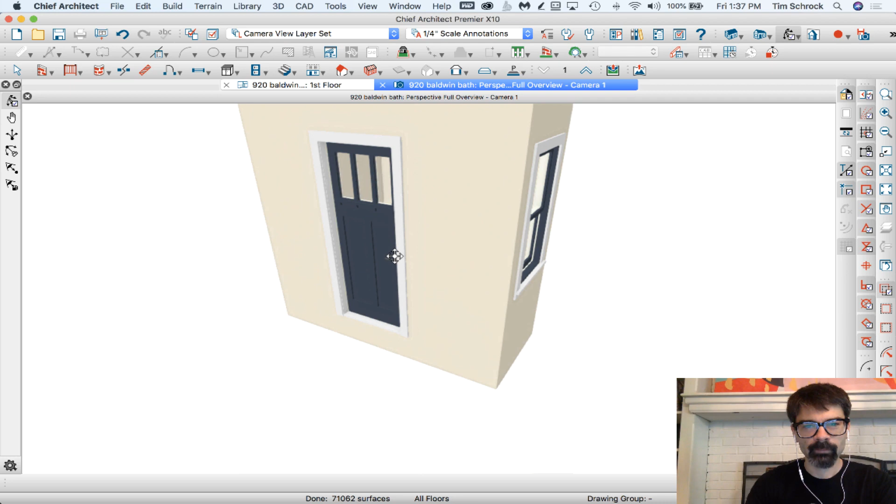All right, the question is, half of this wants to be sloped ceiling. I'm going to take a look at the whole thing here. You got the slope right, there we go. So this is a good start.

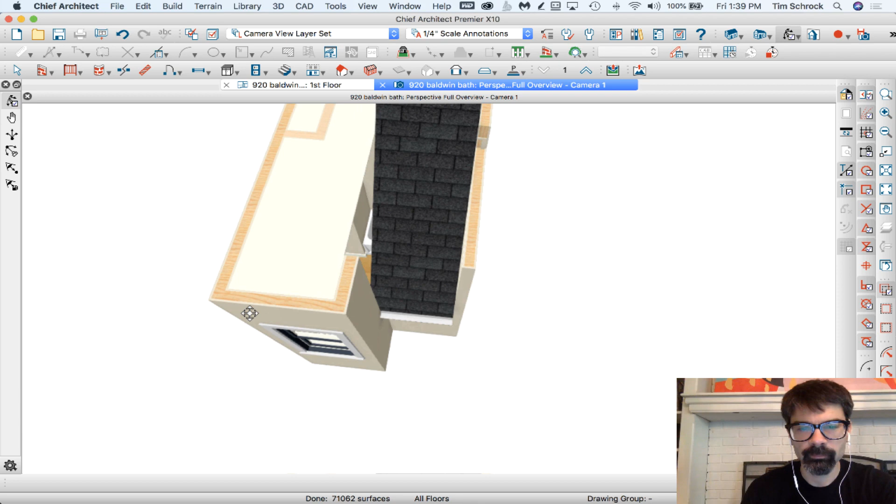Let's get into that here. All right, so since the corner here really needs to remain full height, right? Let's go. Yep. This corner, this wall is going to remain full height over here, right? This one here, this wall on this side is going to be sloped, and we can do that in a couple different ways.

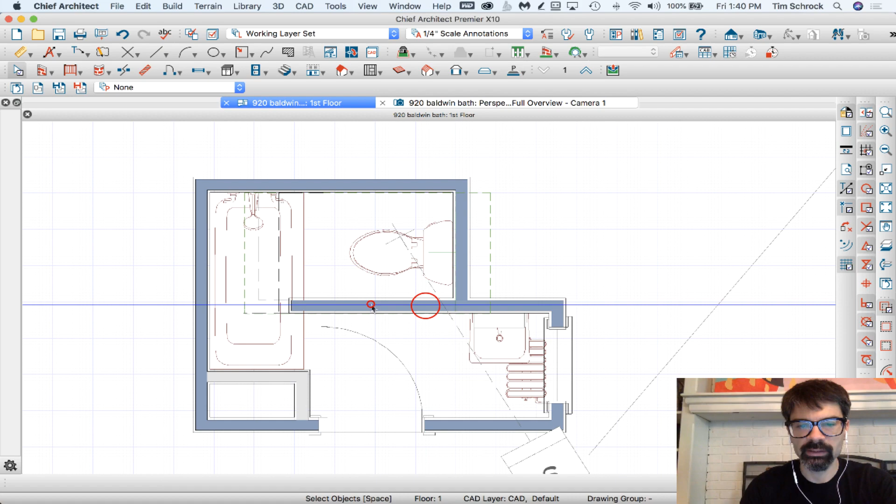So what I'm going to do is I'm going to break this wall here. You've got a single wall. No, I'm sorry, you don't have a single wall, you've got two walls. That's great. What you've done is fantastic. You've flipped the layers, so the exterior of this wall is on the top, the exterior of this wall is on the bottom. Fantastic. I'm going to select the wall then and hit the number 3 on my keyboard.

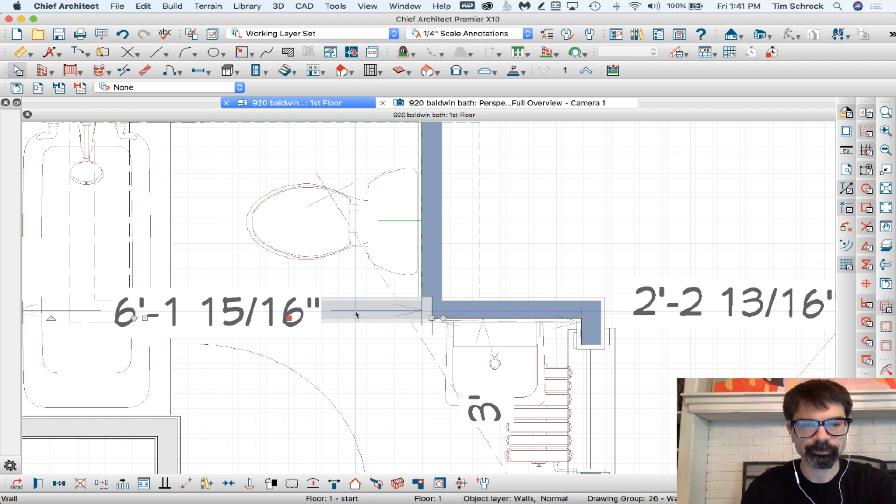And that puts a break in this line of the wall, so I can pull this one up, and this one stays where it is. Now, I'm going to open this one. What I did was double right click, so this menu popped up. And I'm going to go to roof cuts wall at bottom, right there.

So any roof that is cutting this wall, typically any roof that's over this wall, Chief would cut the bottom, or cut the top off of the wall, and the bottom would remain. This little piece in the specification means that the top remains and the bottom is gone.

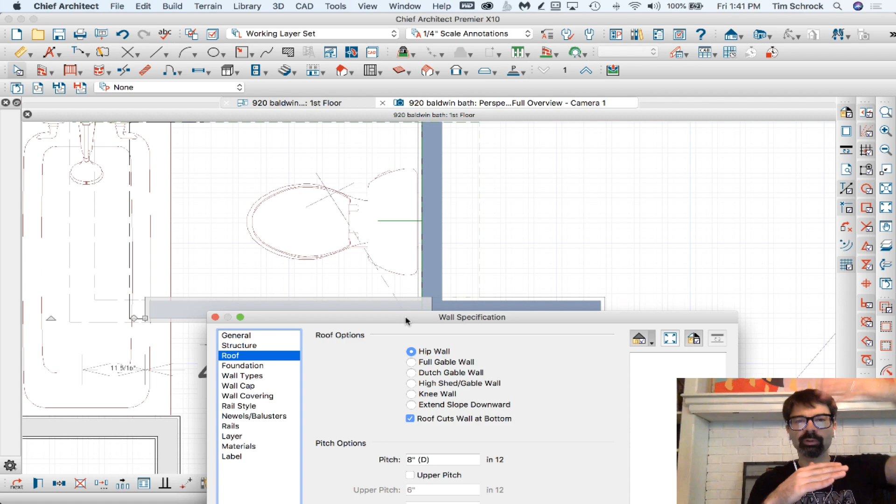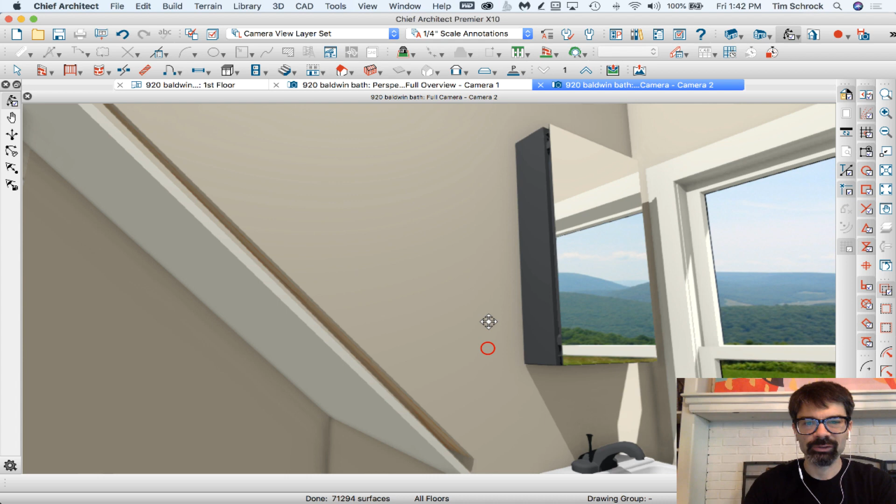Okay, let's pull that up. So I can hit the OK button. Let's see if that did it. Sometimes it doesn't work well. And so I have a little trick that shows what it does. But it worked just fine here.

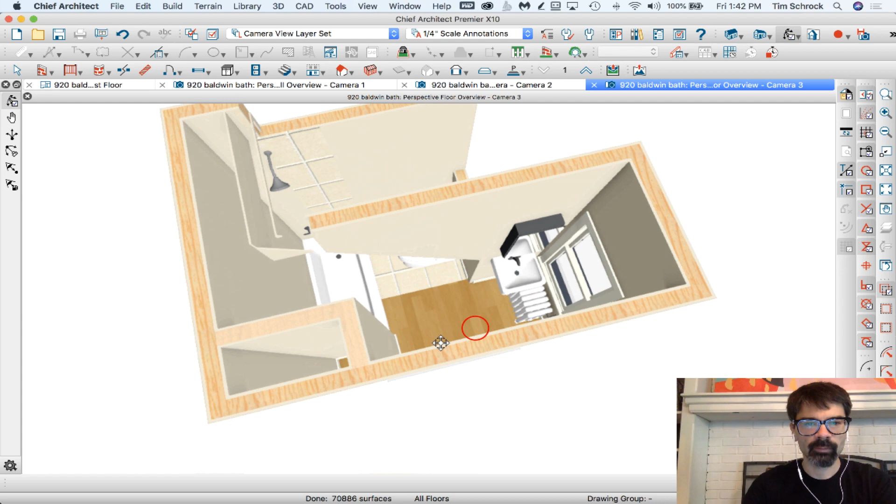Now the one thing that's odd is this piece, this gap here. We could probably... I think, let's take a dollhouse view of this. I'm guessing what you were trying to do is you're trying to make that ceiling height there.

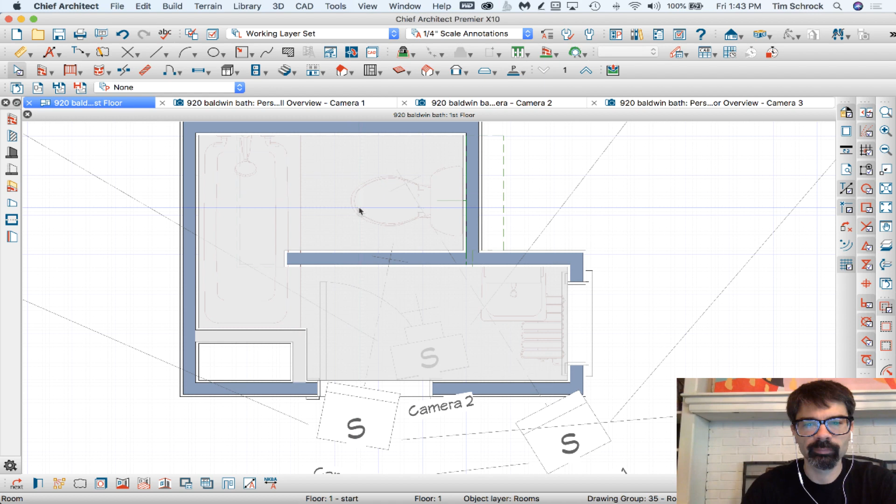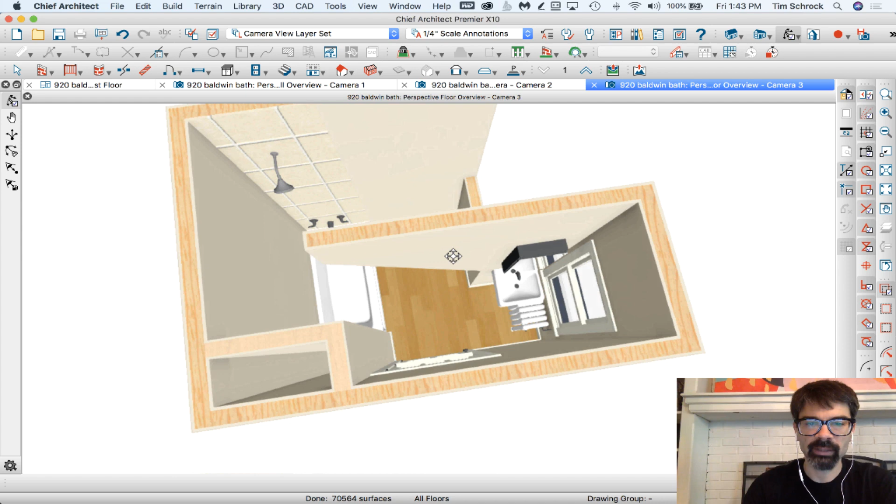I don't think we need these invisible walls here, because I don't need to make this a separate room of the toilet. So in order not to show this here on this plan, it's a little tricky because it's confusing, right? Why would we show this here? I don't want the base molding to not follow this wall. In past versions I've run into that problem.

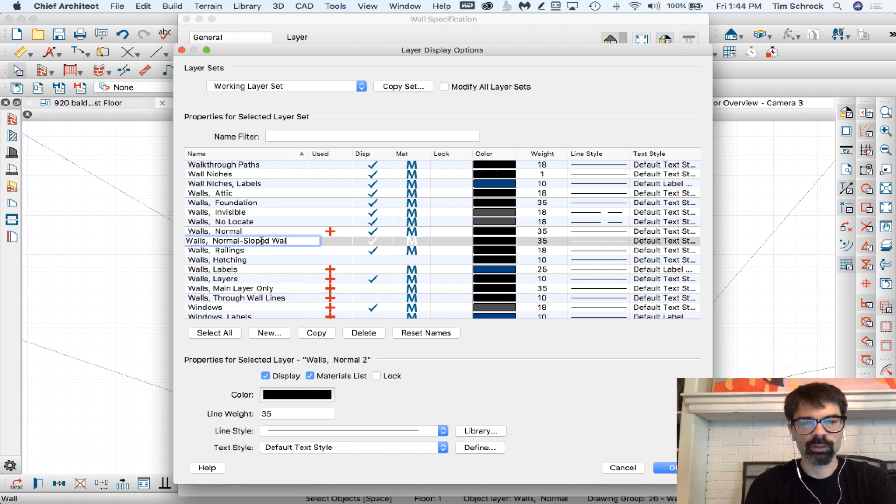Okay, so what I would do is this. I will open this wall object again, and we're going to go to Layer, and I'm going to define that layer, and we're going to copy the normal layer to a normal 2. Now you could leave it normal 2, but that's not very descriptive, so I'm going to call it normal sloped wall, like that.

Now in all other layer sets, I want this on. In all my cameras, all my sections, elevations, I want that on. But in this plan, I want it off. So I'm going to hit W on my keyboard and go to Walls, Normal Sloped Walls, and turn it off the working layer set.

The other thing I could do, let's turn it back on and select it, and let's make this no room definition. It's not really defining our room, so to speak. It's just defining where it's filling in for the roof. All right, let's turn it back off.

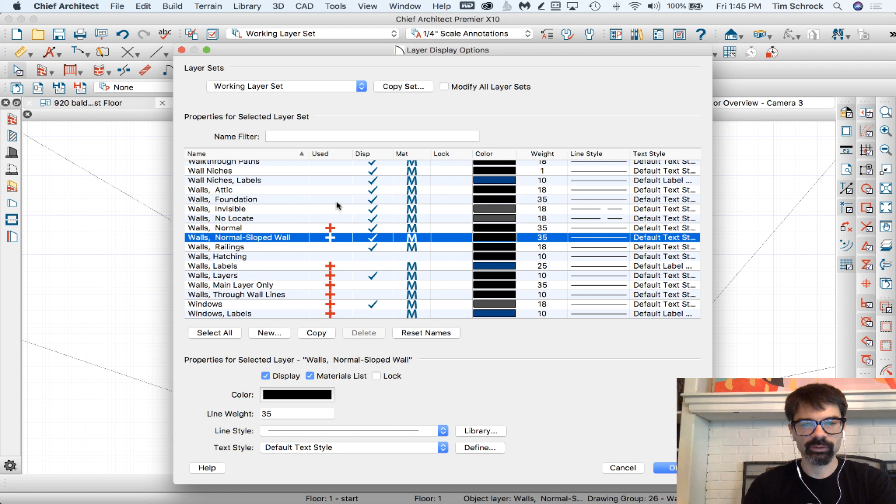So I extended it out to the edge of this roof plane. Let's turn it back off in this plan view. And now when I select the room, there we go, so it doesn't have a room definition.

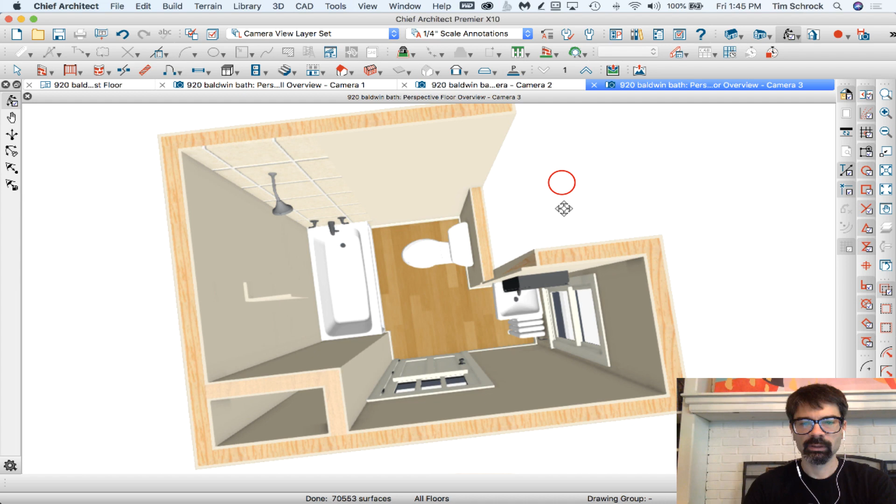Let's take our overview camera. Looks fine there. Let's look inside. Something went haywire. This is where sometimes it works and sometimes it doesn't.

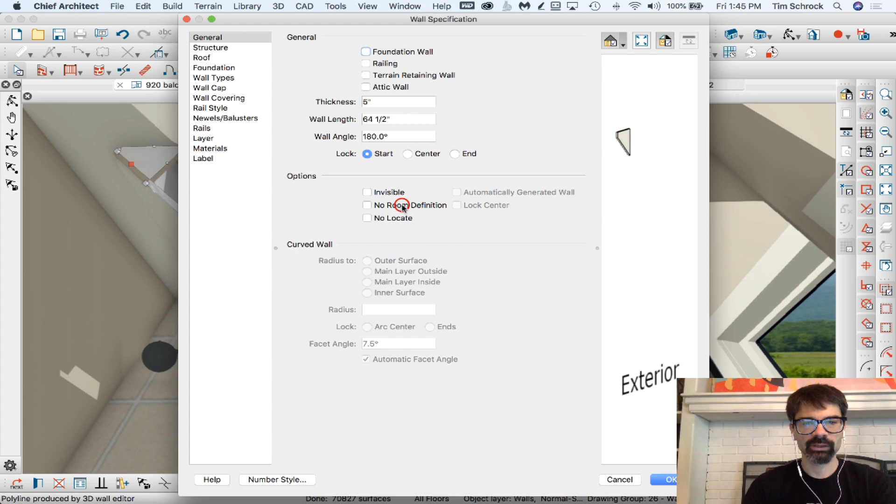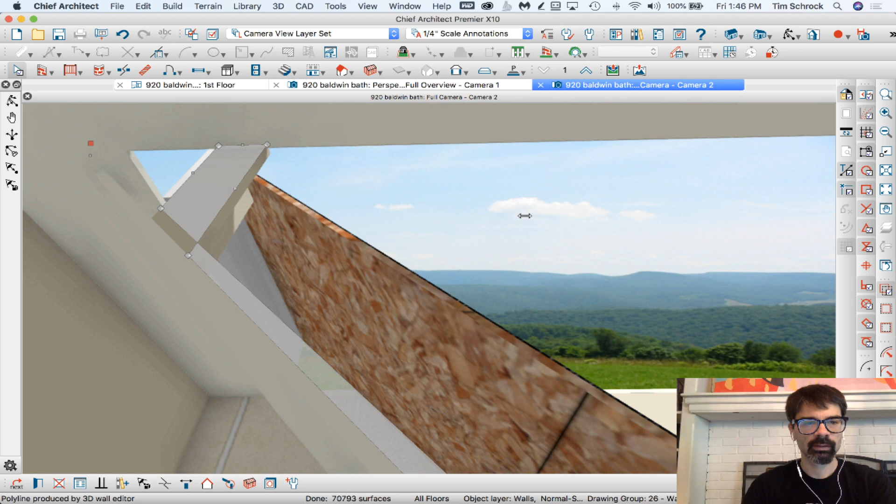So let's uncheck that room definition and see if that... oh, it was the length of it. No room definition, let's pull it back. I'm going to switch to here and split screen. Turn that back on because I need to select it in this plan view here. Roof, let's uncheck roof cuts wall at bottom.

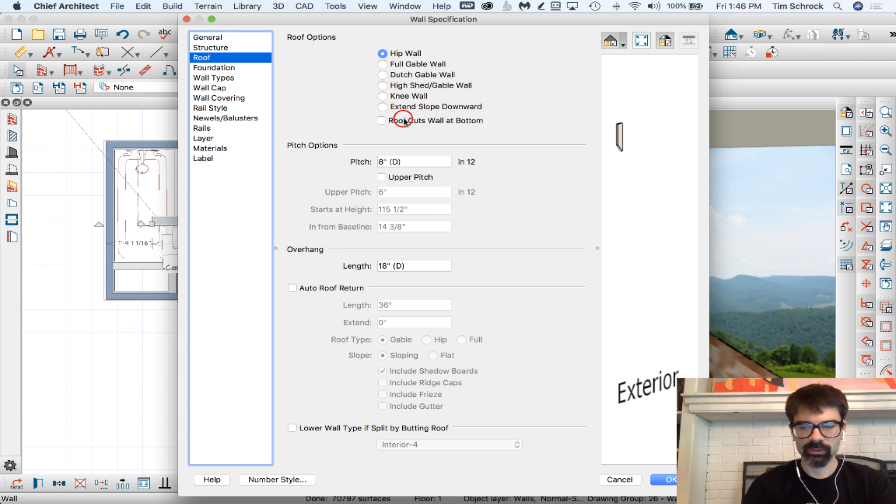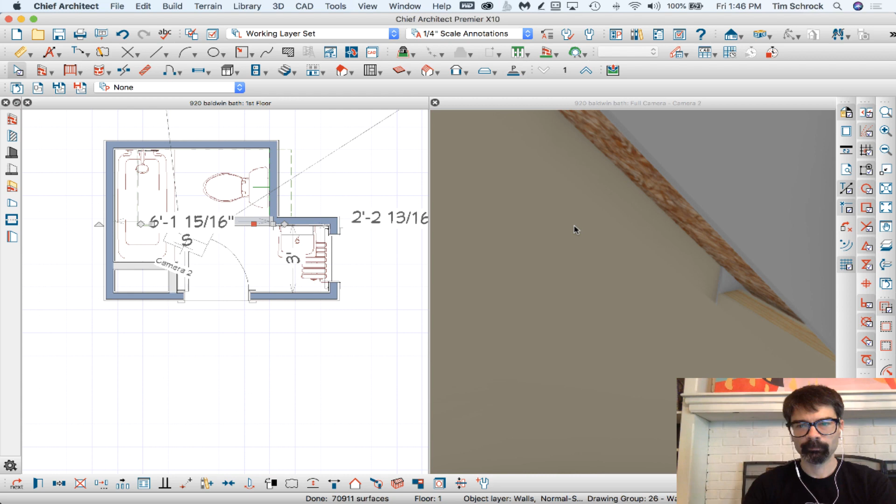Not sure where it went here, so I'm going to open this up and go into Structure, Default Bottom Height. There we go. So it's selected, wall type, structure, roof. There we go, roof cuts wall at bottom.

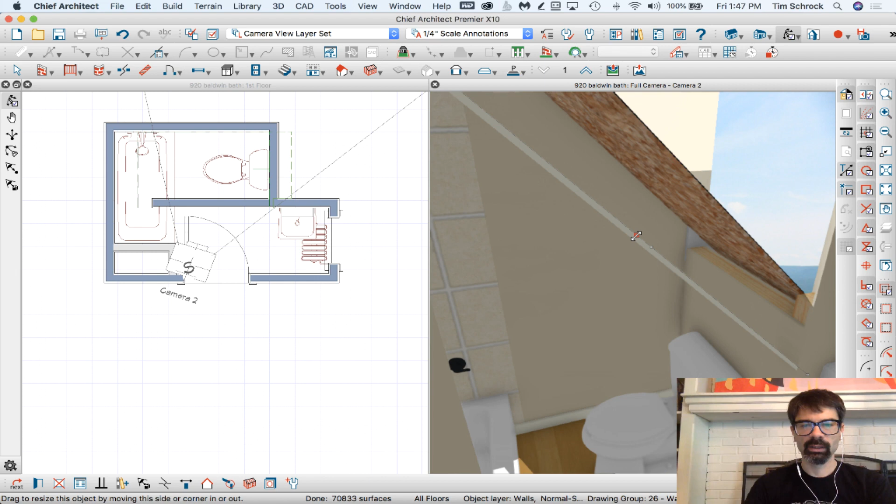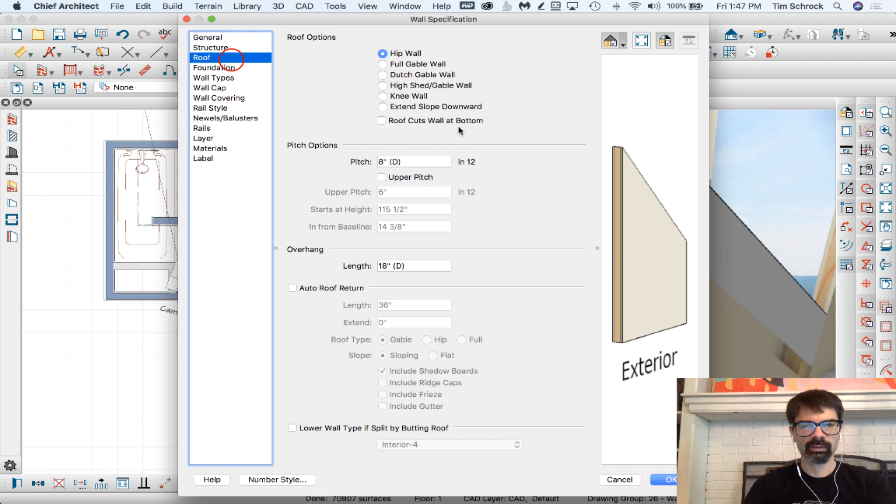See, this is why sometimes that roof cuts wall at bottom doesn't work well. I've never really been able to figure out the whys and wherefores of what it's doing, what I've done or not done. Let's go back to layer, put it back on its default layer, do everything back the way it was. See, it's just not liking it.

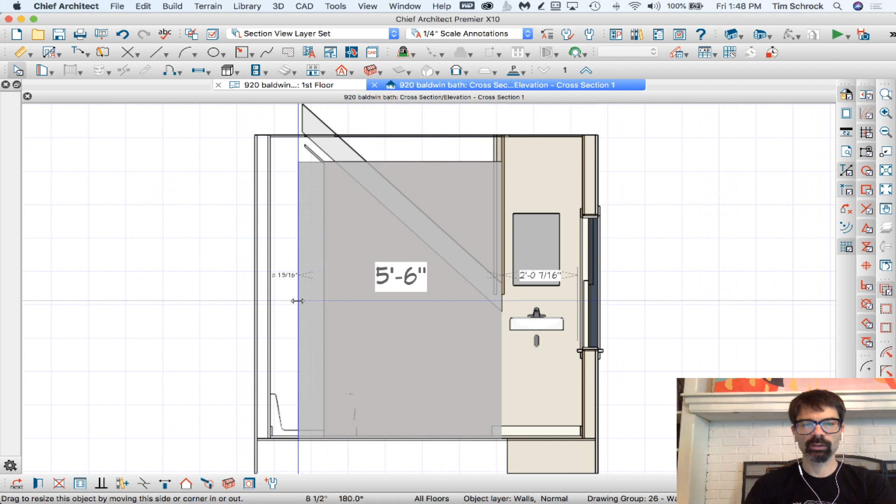So we're going to do this - this is option number 2. I'm going to take a section of this, just an elevation of that wall, and we're going to make it do what we want it to do. I'm going to lift this up. In the wall elevation, you can actually change the geometry of the wall by dragging these edges, very much like a polyline or a solid. So I'm going to bring this up here.

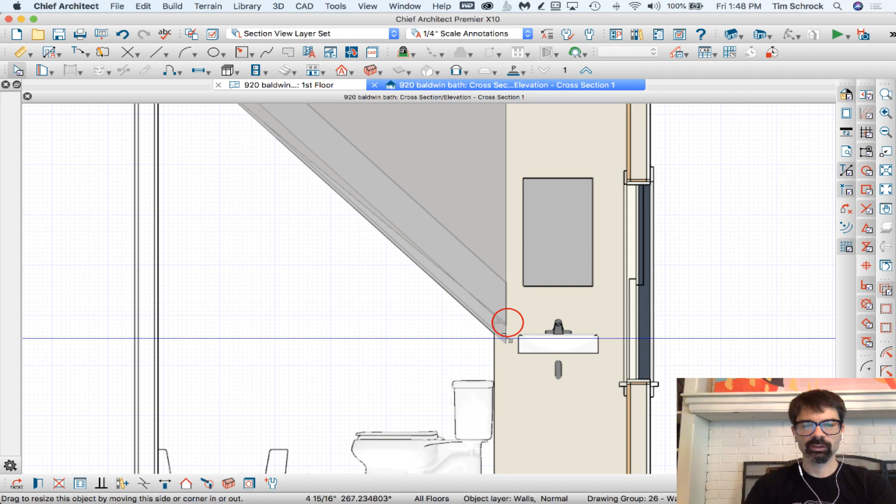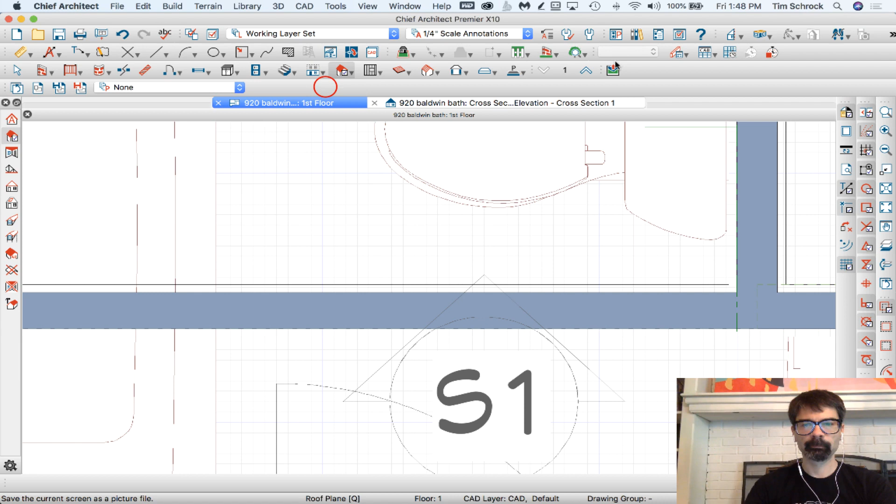Now I just need to zoom in and make that kind of follow the slope of the roof. I'm going to go back down here and pull this roof in so it's not exposed on the drywall layer. I'm going to pull it to the stud layer so that we don't have that trim showing up right there. Now let's show this door open in 3D, and we're going to take a look through here, through the door. It's a little easier just to see that, right? In camera view, that looks pretty darn good.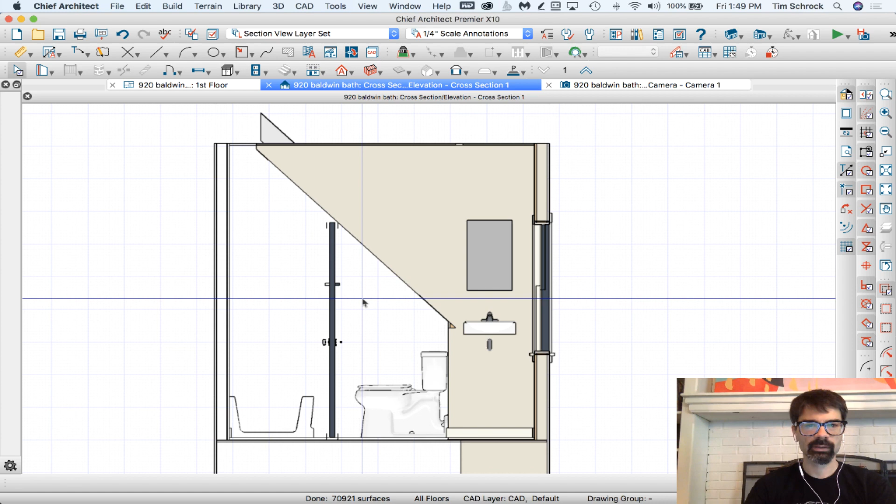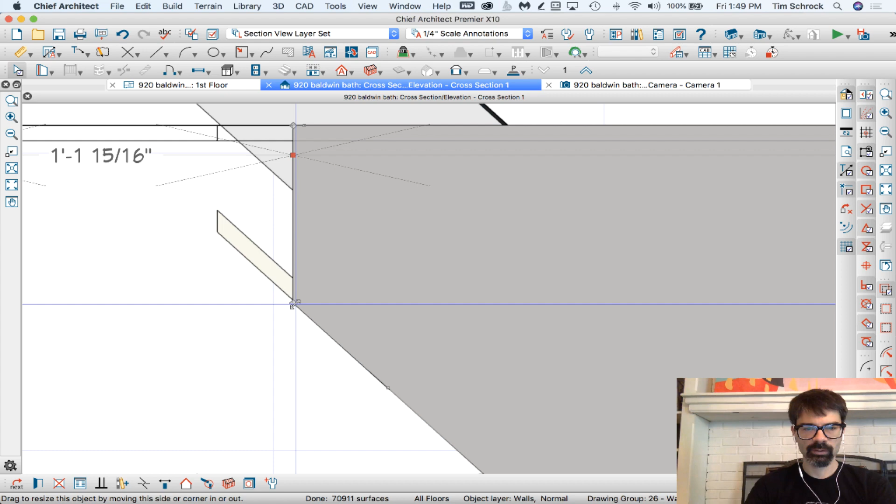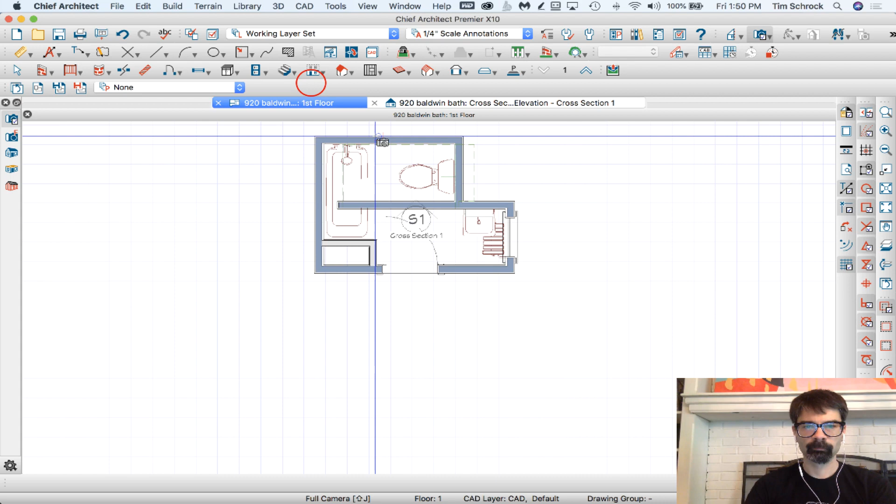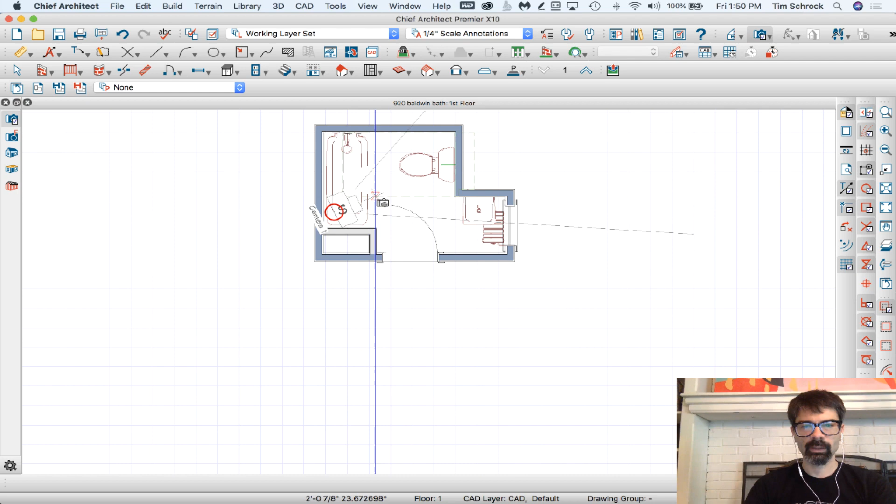Pull this back. And I've got just a bit of - I don't like grid snaps on, so there we go. Alrighty, that's looking pretty good there. Back to turning this on to different layer, no room definition, that's fine. Layer, sloped wall - we're going to turn that layer off. And there we go. Let's take a quick look inside again.

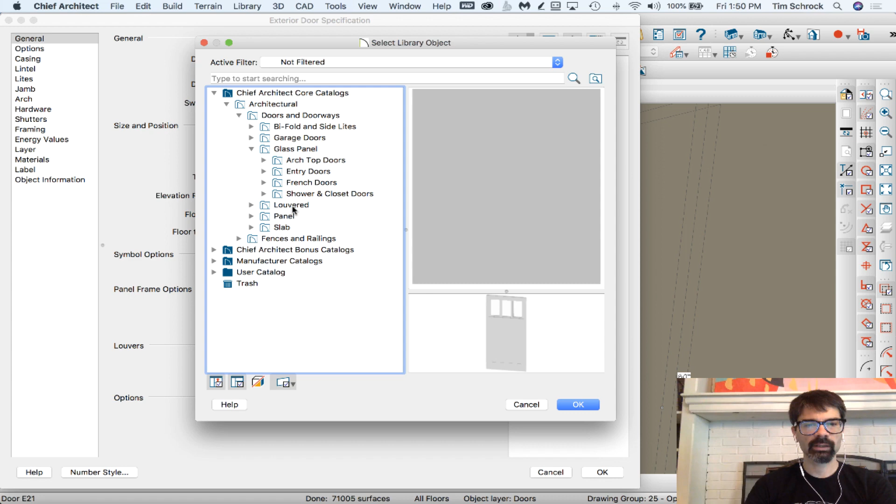Close that door. I'm going to imagine that is not an exterior door into this bathroom, so really quickly I'm just going to go into the library, and we'll do a 6-panel door, I'm assuming - I have no idea. There you go.

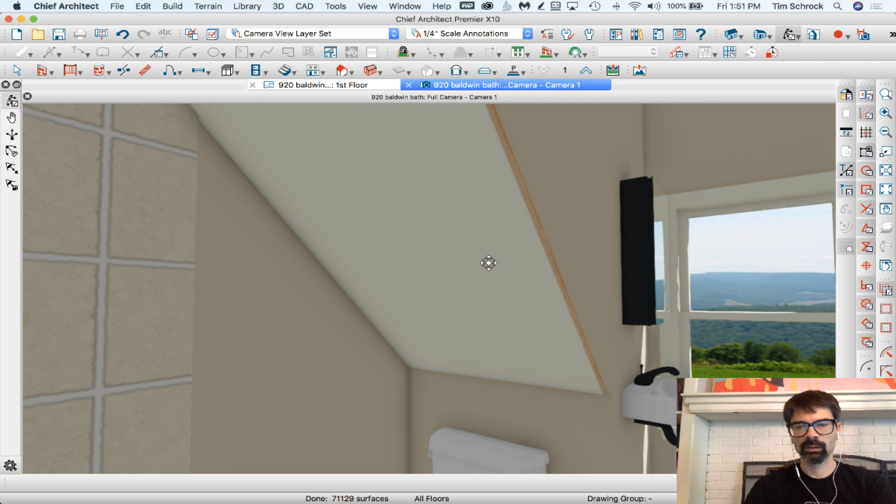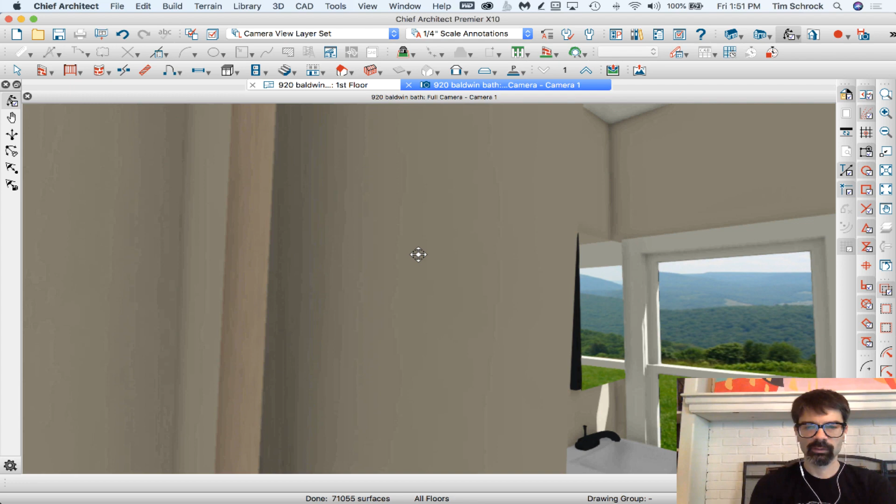There's a sloped wall on half the room. Now you do end up often with just a little bit of wood showing there. Let's pull that over just a wee skosh. There we go.

If I grab this - see, and take it to the drywall edge, you see the trim right here - so I'm going to try to just pull that back just ever so slightly. I'm holding the command key on my keyboard. If you're on a PC, it's a control key.

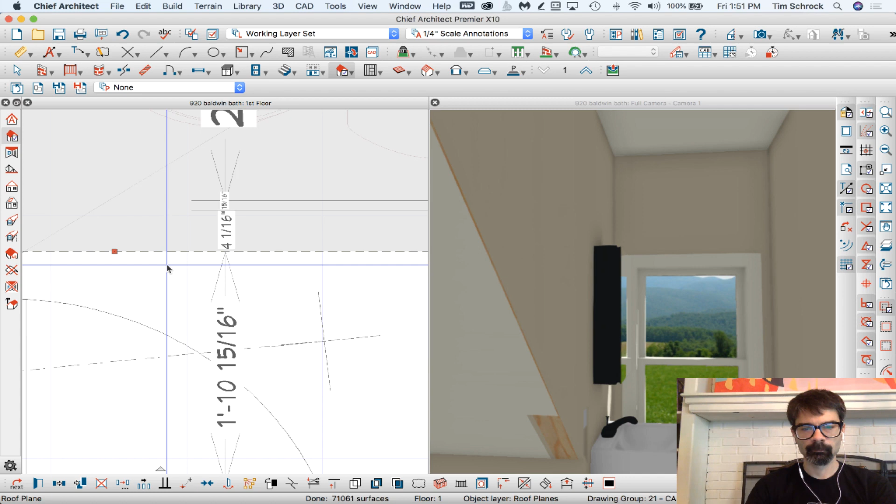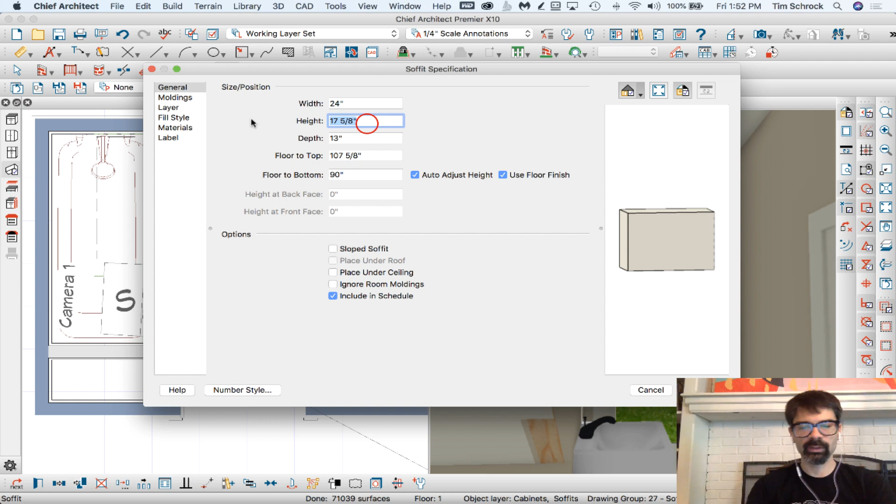If you don't want that, you could always make a sloped soffit right there - really thin sloped soffit like this. I'm going to hit the T key on my keyboard to make a soffit, and that's going to go right there. Height of it is going to be 1/4 inch. We're going to slope soffit, place under the roof.

Let's pull that all the way out to the edge of this drywall. And the geometry of it goes up to here. We're just going to place under the roof one more time.

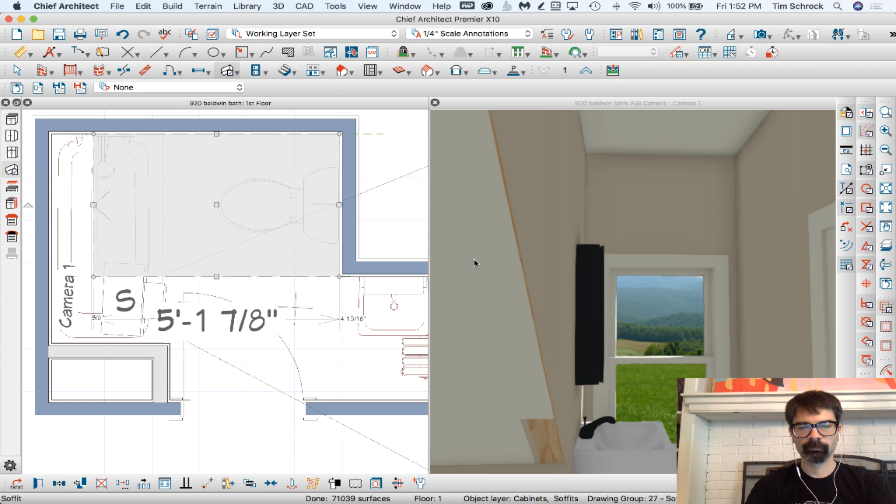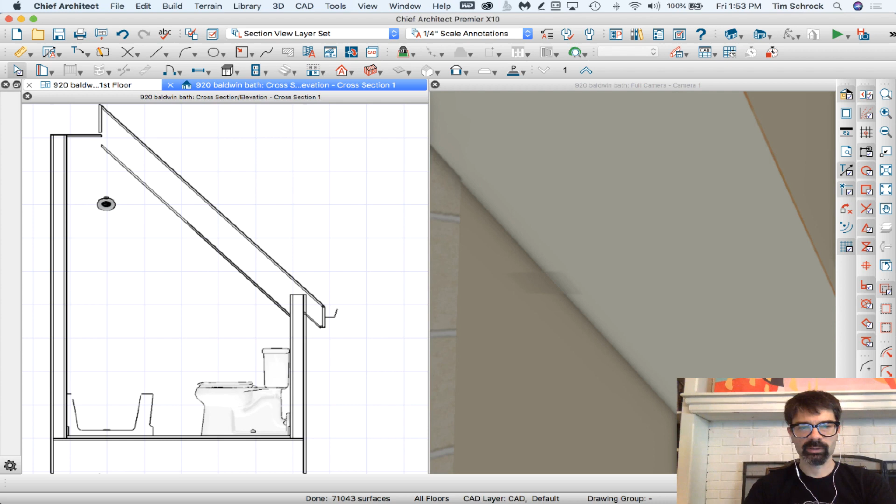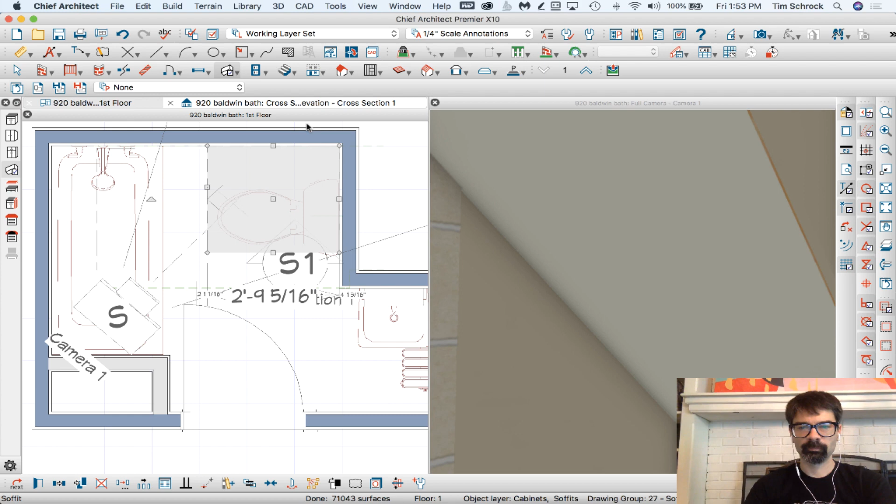And I see that didn't exactly work as I thought it would. Take a section of this, see where our soffit is coming in at. Ah, it's hidden in the 1/2 inch. So we need to make it just thicker, say 5/8 of an inch, because it's hiding in the 1/2 inch drywall of the ceiling. Nope, don't need that one. Need that one. Let's make that 5/8. Well, the ceiling is 5/8, so let's make it 3/4.

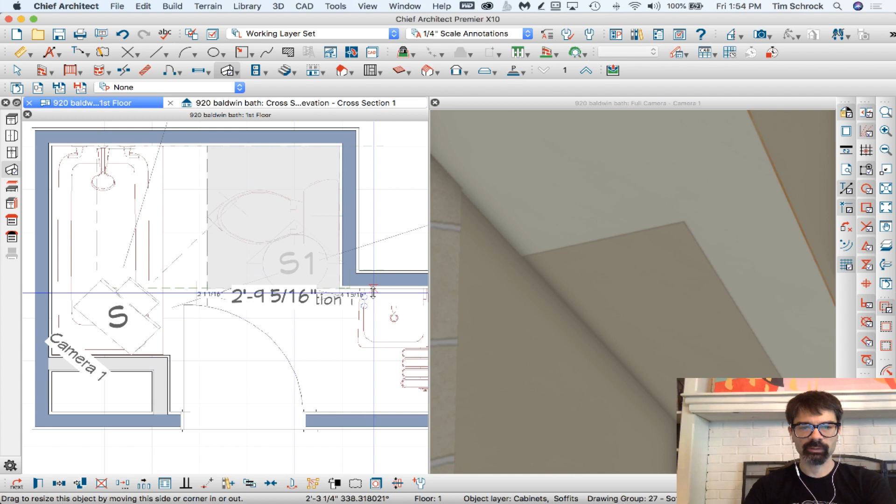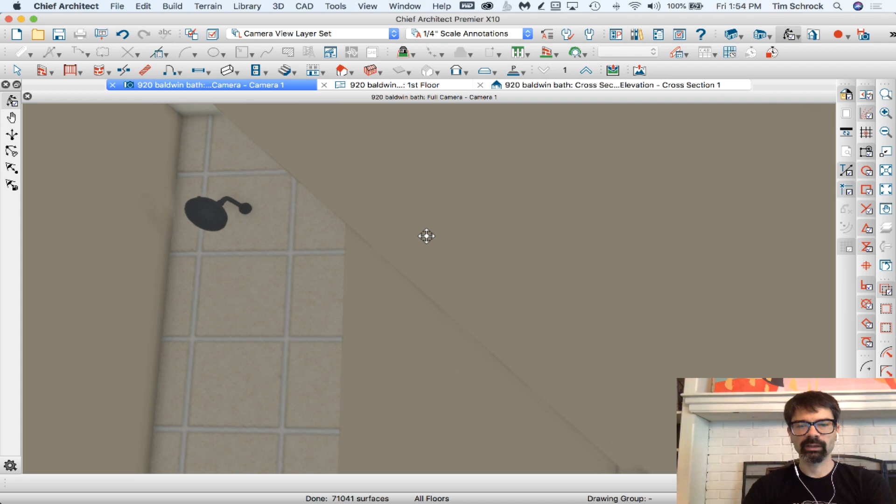There's our soffit. Pull that out to the edge of the drywall. Pull that up to the geometry here. Let's adjust, place under the roof. Go over to our camera view. I'm going to double click on that so that we are seeing everything. And now, yeah. Now if you want to show that as white like the ceiling, we can just paint the soffit the same material color here. And there's your soffit.

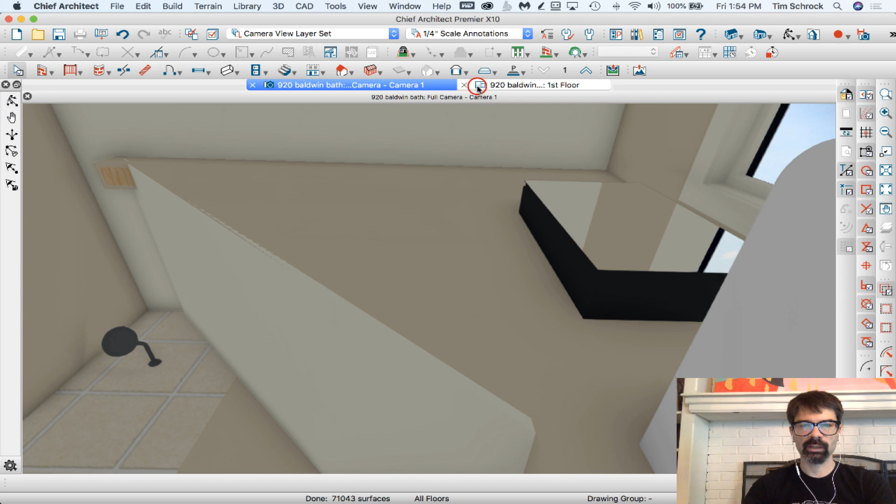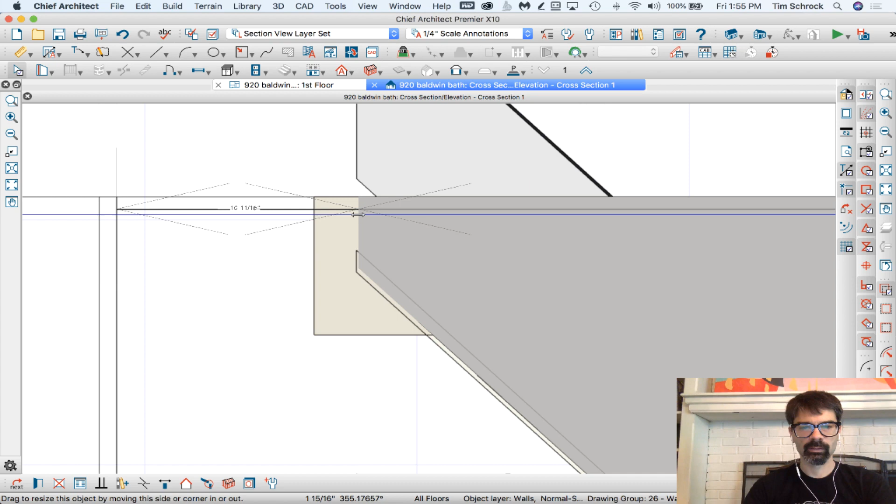Now I noticed my wall is not taking the right shape. So let's take a quick section of this. Not sure what it's up to with that. Pull that back. Let's go into plan view. Take our roof all the way - we'll just extend it all the way up here. Doesn't really matter beyond that piece.

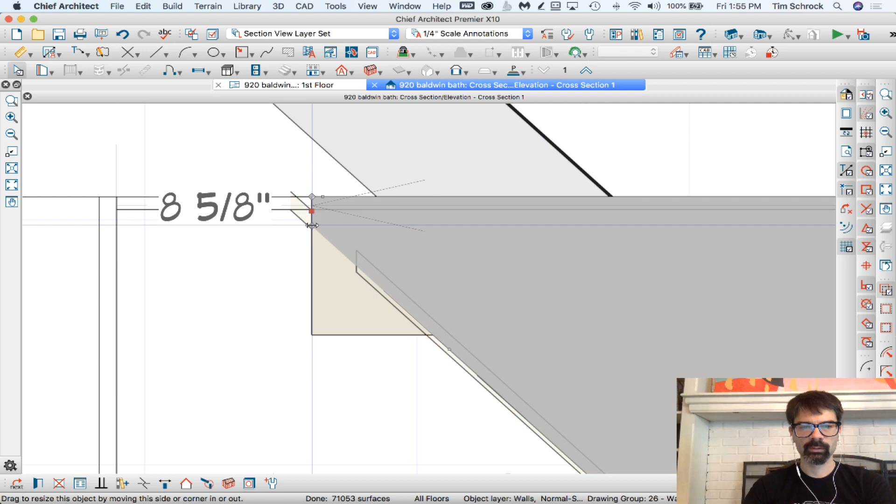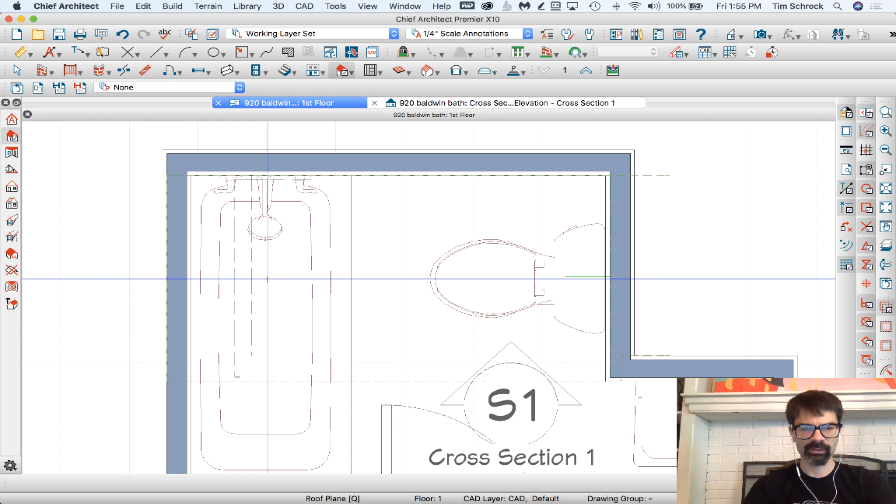There we go. So I just hit the command key, or if you're on a PC, control, when I click and hit the command key, just pull it up just ever so slightly, and it took that piece away. So now I'm going to extend my geometry of the soffit up just a little bit further, open it again, place under the roof. There's the soffit shape going all the way up to the ceiling. The wall meets up there.

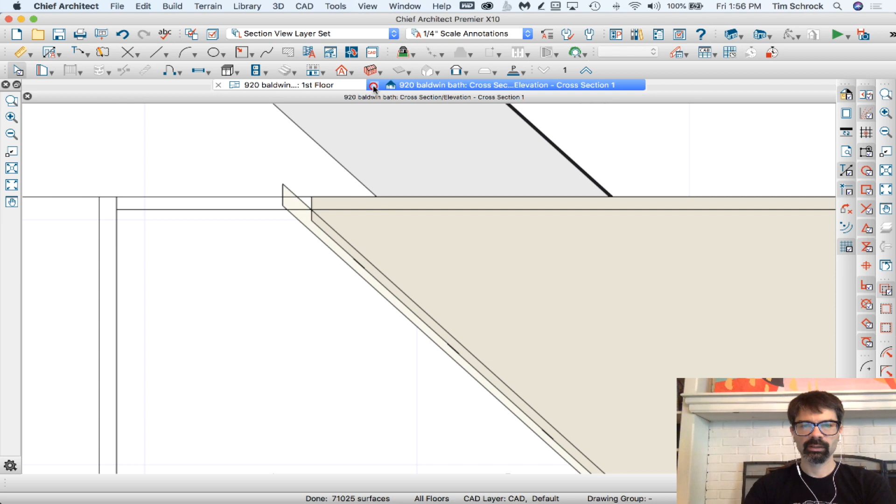I don't need that view, I need this view. Shift J pulls up the camera. And there is your bathroom.